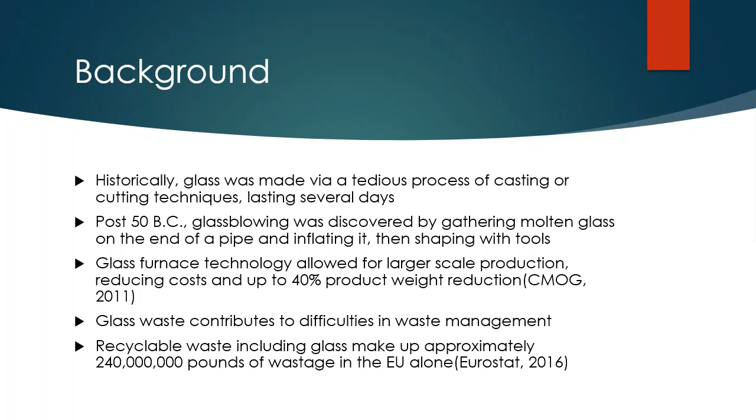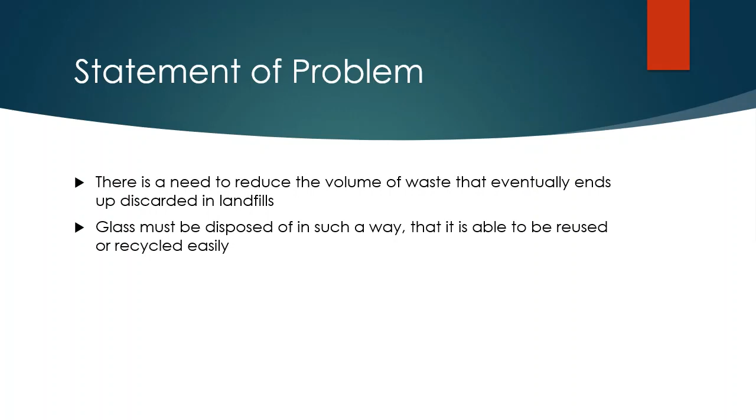Our problem statement states that there is a need to reduce the volume of waste that eventually ends up discarded in landfills. Glass must be disposed of in such a way that it is able to be reused or recycled easily. Our aim for this project is to design a machine that pulverizes glass bottles into glass cullets.

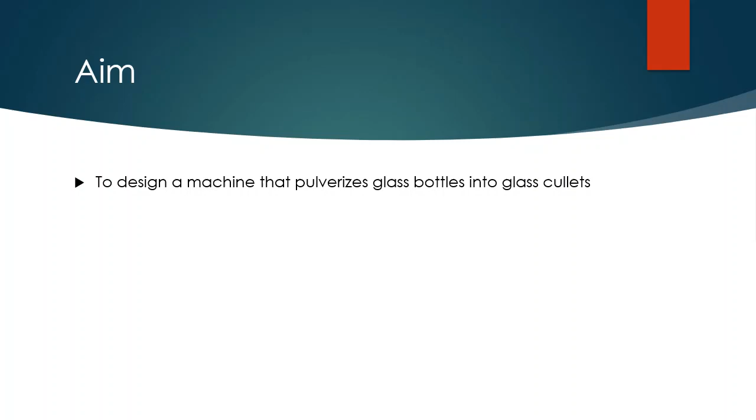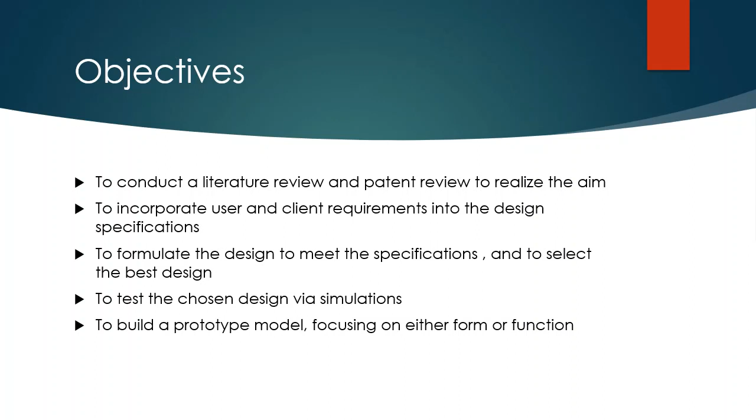The project objectives are to conduct a literature review and patent review to realize the aim, to incorporate user and client requirements into the design specifications, to formulate the design to meet the specifications and to select the best design, to test the chosen design via simulations, and finally to build a prototype model focusing on either form or function.

Before beginning the process of designing the device, relevant literature was studied. It was found that the landfills in Trinidad and Tobago are approaching capacity and waste volume must be reduced. Glass can be recycled in many ways since it does not lose its mechanical properties when reused. For instance, glass residue can be used in place of river sand to improve the properties of cement mortar.

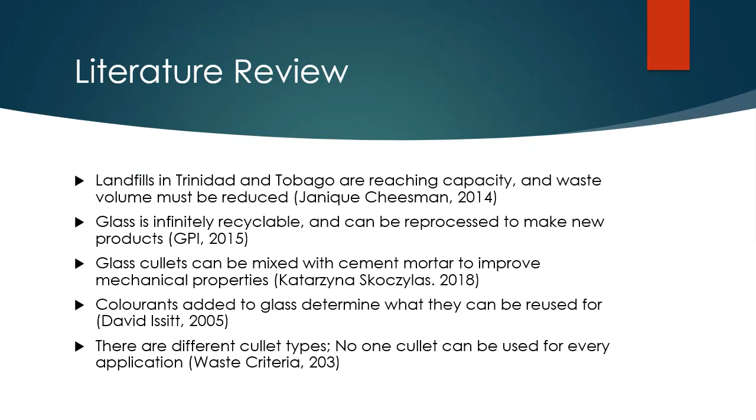However, all glasses cannot be used for all purposes. Colorants added during the manufacturing process cannot be removed, and also, glass types determine the cullets they produce.

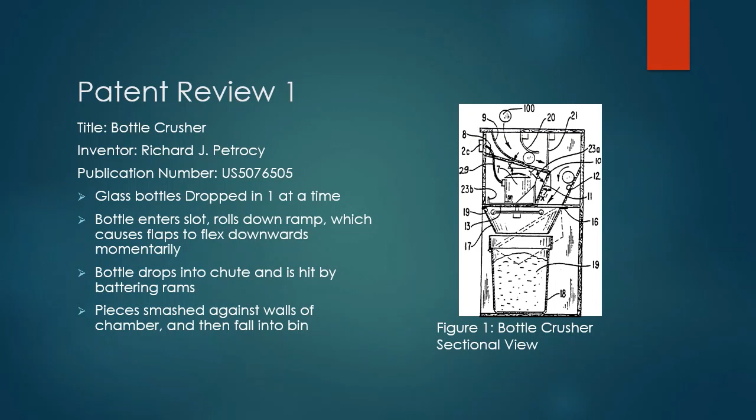Now, 4 patents were reviewed in order to familiarize ourselves with related devices that are already in use. In the first patent, titled Bottle Crusher, glass bottles are fed in the intake slot one at a time. The bottle rolls down the incline and through rubber flaps. It then falls under the influence of gravity onto rotating hammers, which break the bottles into large fragments. These hit the insides of the chamber to break down further, eventually falling into the collection bin.

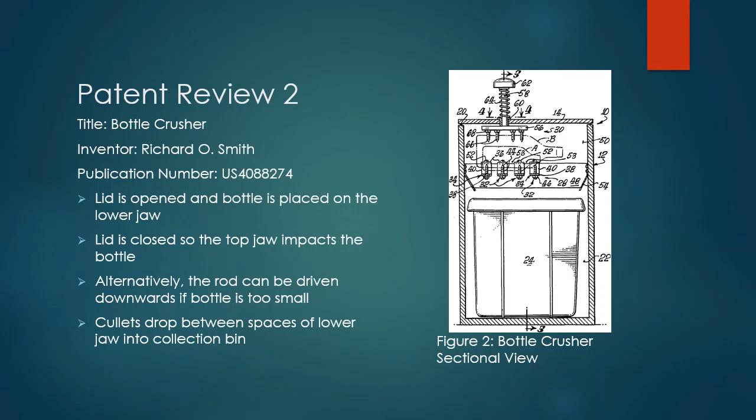The second patent, titled Bottle Crusher, is a manual device. The lid can be opened via a hinge and a bottle can be placed on the lower jaw cradle. The upper jaw is attached to the lid, and so closing this lid will cause that jaw to impact the bottle. The many tooth members allow for a reduction of force needed to break the bottle. If the bottle is too small, the rod connected to the upper jaw can be driven downwards. In either case, cullets fall through the spacings in the lower jaw into the bin.

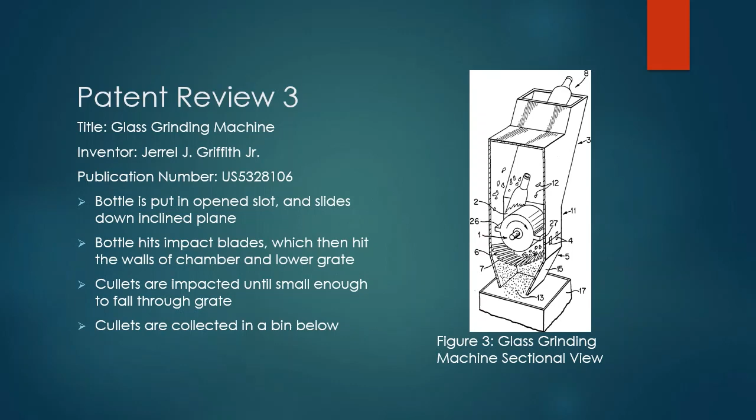Patent 3, titled the Glass Grinding Machine: bottles are fed in and allowed to slide down a ramp. They then hit vertically rotating impact blades, and the ensuing glass shards impact the chamber and lower grate at high velocity. When the grains are small enough, they slip through the grate into the lower bin.

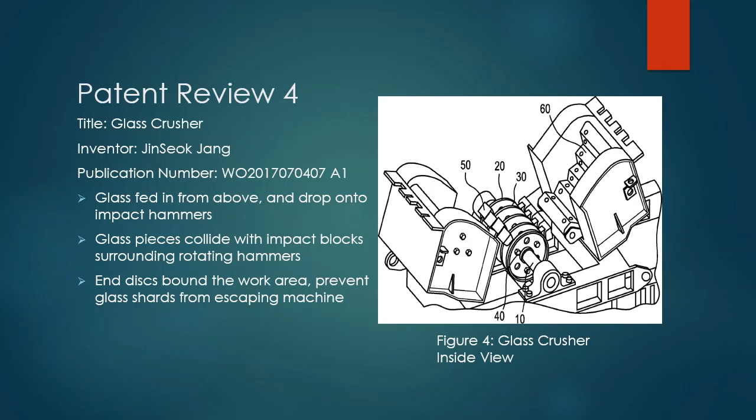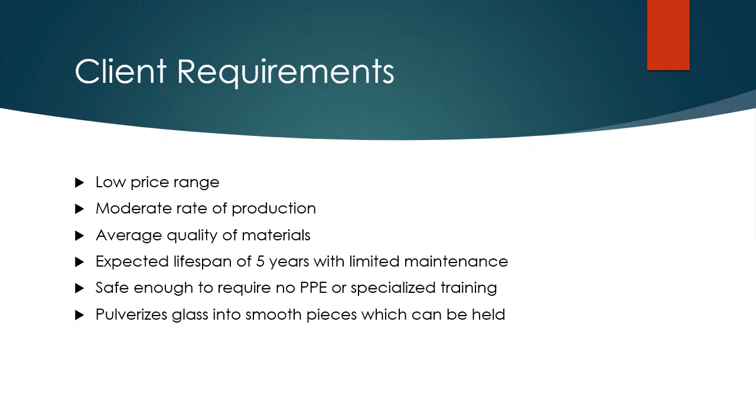Client and user requirements. After enough research, a list of the client's requirements were generated. If able to meet the client requirement, the design should have a low price range, a moderate rate of production, an average quality of material, a lifespan of 5 years with little or no maintenance. It should be safe such that no PPE or specialized training is required, and it should be able to pulverize the glass into smooth pieces that can be held.

User requirements. The machine should be able to be used with a low level of skills. It should be able to be placed on the counters or in corners. It should be able to process one bottle at a time as fast as it can be fed into the machine. And it should be robust enough to require limited downtime.

Design specification. The machine can process glass bottles. It must fit under counters of restaurants and bars. It must use the standard 110-volt power supply. Must have the proper shielding or guards. Cullets must be easily collected. Vibrations from the machine must be minimized. Standard components must be used. It must have a built-in fail-safe, and it must be simple to use.

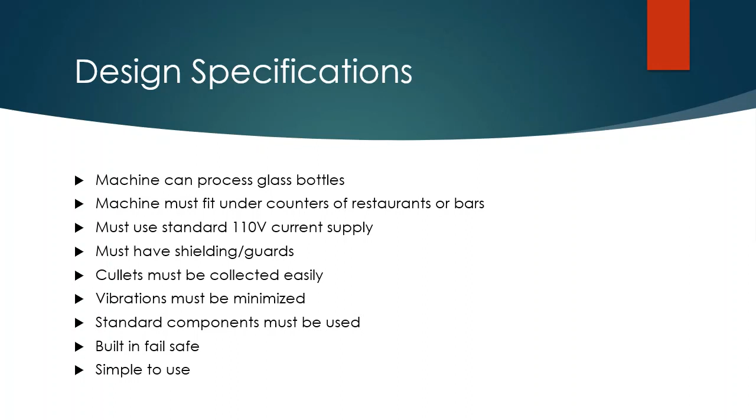Key attributes. Based on the design, the key attributes were developed, and these are user-friendliness, cost, stability, safety, and noise.

The metrics. The metrics use a scale of 1 to 3 in this project, with 1 being the worst case scenario and 3 being the best case scenario.

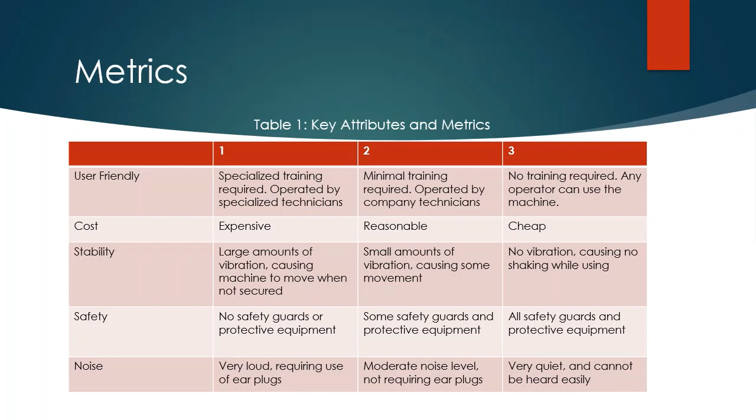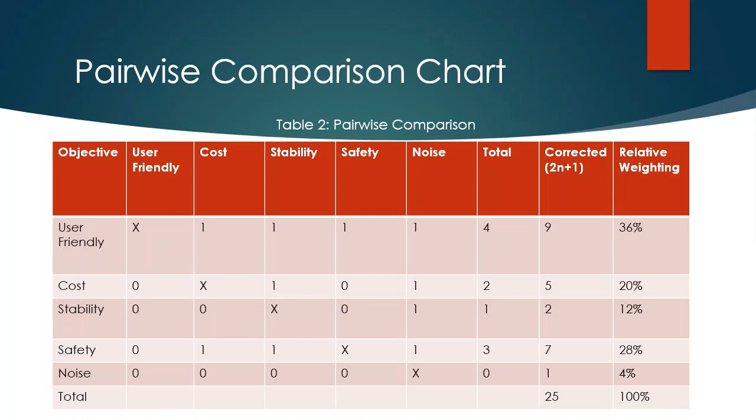We now move on to pairwise comparison, where the relative weighting of each design indicates the importance of each key attribute. In order of most important to least important, user-friendliness is the most important, followed by safety, then cost, then stability, and lastly noise.

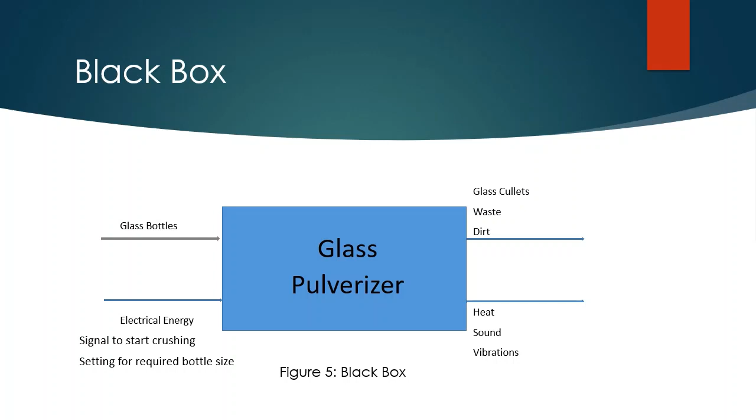Here we have the functional analysis. The first step is the black box. It consists of an input, a process, and an output. The inputs on the left are glass bottles, electrical energy, a signal to start the crushing process, and sometimes setting the bottle size. In the middle we have the process, which is pulverizing glass, and on the right we have the outputs, which are glass cullets, waste, dirt, and energy lost as heat, sound, and vibrations.

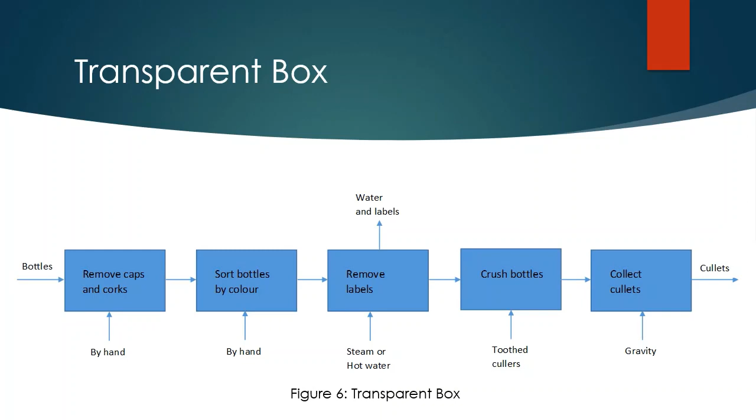Moving along, we have the transparent box, which is similar to the black box, however it shows all the sub-functions involved in pulverizing the glass, as well as the inputs for each sub-function. Then we have the means tree, which shows the main function as well as the sub-functions and the means by which they may be achieved.

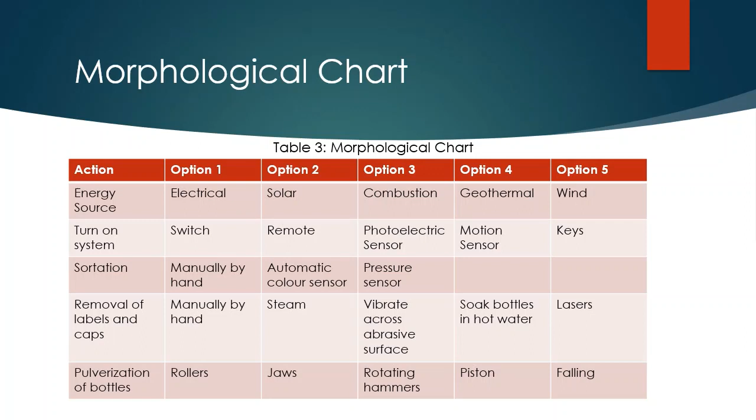The morphological chart is how we explore possible ways of implementing the different sub-functions. It also aids in developing a conceptual design. Moving on to conceptual designs. Using the morphological chart as mentioned previously, 3 conceptual designs were developed.

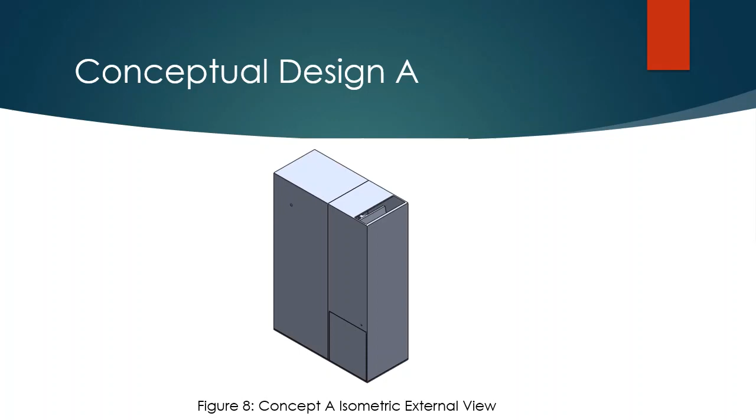Conceptual Design A. The figure to the right shows a partially transparent isometric view of Design A without its body casing. The design is 24 by 10.5 by 34 inches, which makes it compact and easy to store. Glass bottles must be manually loaded into the machine's crushing chamber via its top opening. The rotating arm and drive lever force the mobile toothed plate against the stationary toothed plate, which pulverizes the glass bottles.

This is the device's pulverizing mechanism, which is powered by a motor and belt drive system. After pulverization, the cullets fall through the exit space at the base of the chamber into the collection bin. A door at the base of the device allows for easy placement and removal of the cullet bin. The body casing is easily removable for maintenance purposes.

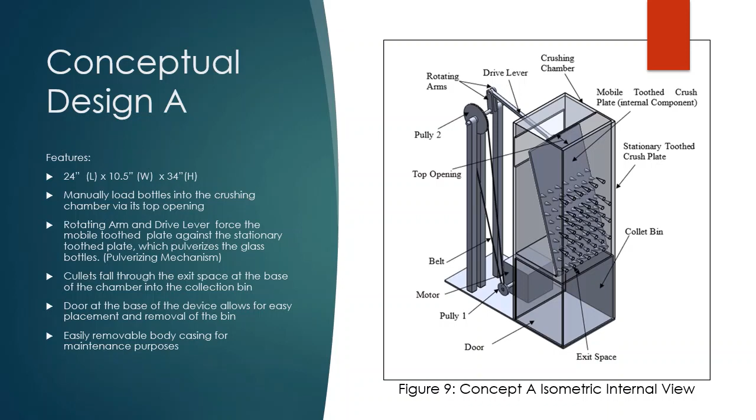Conceptual Design B. The figure to the right shows an isometric assembly of the design's internal components. Also being a compact design, this concept measures 24 inches in both length and width and 44.5 inches in height. Glass bottles must be manually loaded into the machine's chimney, which leads to the crushing chamber.

Driven by a motor and belt drive system, a rotating disc drives the hammer up and down, which impacts and compresses the glass bottles within the crushing chamber. This is the device's pulverizing mechanism.

Sharp teeth at the base of the crushing chamber, as well as at the base of the hammer, aid in the pulverizing process. Under the vibration of the crushing chamber, the cullets fall through the mesh holes at the base of the chamber into the collection or cullet bin.

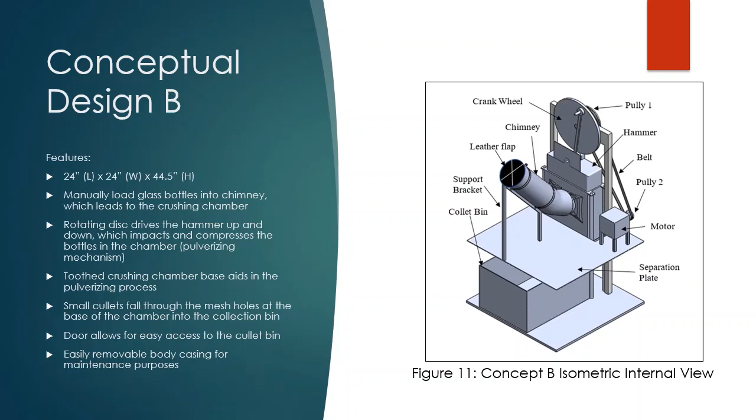Similar to concept A, a door at the base of the device allows for easy placement and removal of the collection bin. The easily removable body case allows for easy access to the device's internal mechanical and electrical components for maintenance purposes.

Conceptual Design C. The figure to the right shows a partially transparent isometric view of the design's internal components. This is the largest design compared to the two previously mentioned, measuring 24 by 28 by 54 inches in length, width, and height, respectively. Bottles must be manually loaded into the chimney, which leads to the pulverizing chamber.

A rack and partial pinion retracts the pulverizing plate upwards while simultaneously compressing 4 springs. When the pinion loses contact, the rack slips and the pulverizing plate is forced downwards by the springs into the glass bottles, pulverizing them in the process.

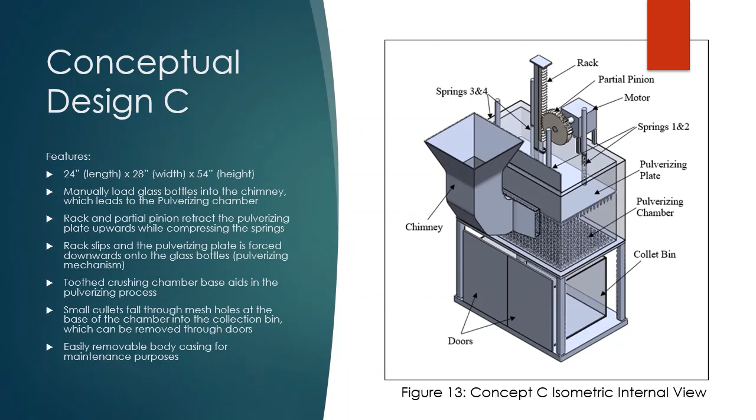The toothed crushing chamber base aids in the pulverizing process. The cullets fall through the small mesh holes at the base of the chamber into the collection bin, which may be easily removed through the doors. Similar to the other two conceptual designs, the body is removable for maintenance purposes.

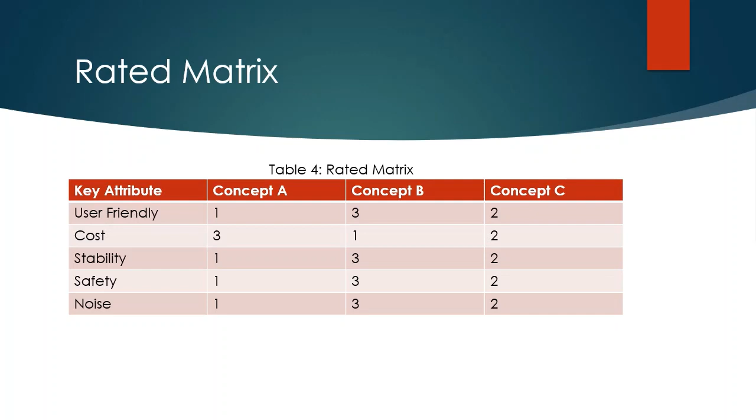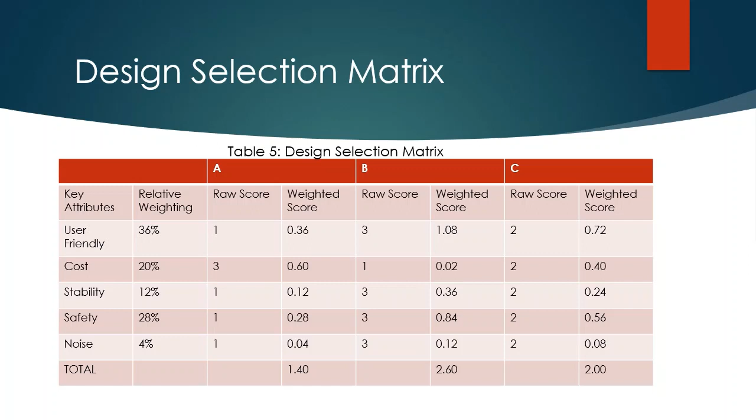Rated matrix. Each design concept was evaluated using the metrics shown in the previous slides to obtain the raw score for each key attribute. Using this design selection matrix and the rated matrix, the weighted scores were then calculated. It was found that design B had the highest total weighted score, and hence it was the selected design for this project.

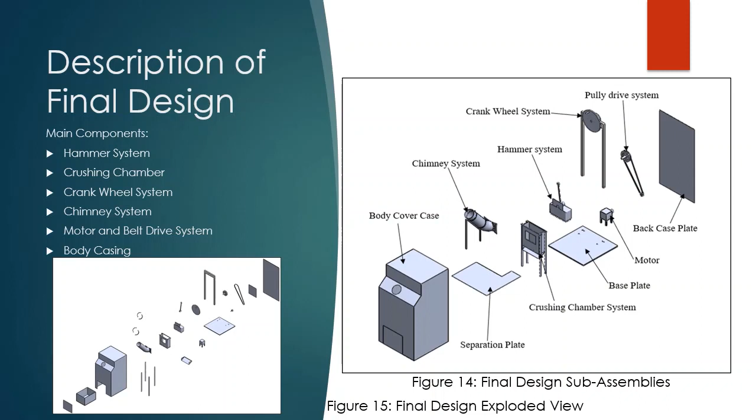Description of final design. The main components of the final design include a hammer system, a crushing chamber, a crank wheel system, a chimney system, a motor and belt drive system, and a body casing.

The hammer system. This system consists of a rigid connecting rod and a hammer. The connecting rod links the hammer to the crank wheel, which transfers motion. The hammer spans the internal cross-section of the crushing chamber and has a series of teeth at its base, which increases the pulverizing effect upon impacting the glass bottles.

The chamber entry cover plate blocks the bottles from entering the chamber when the hammer is at its lowest point of its stroke.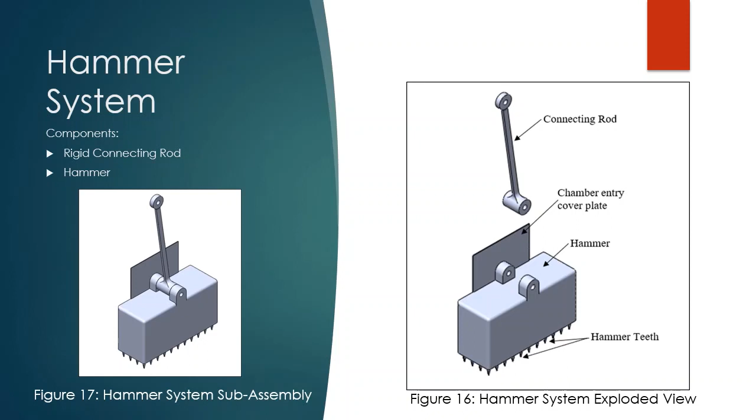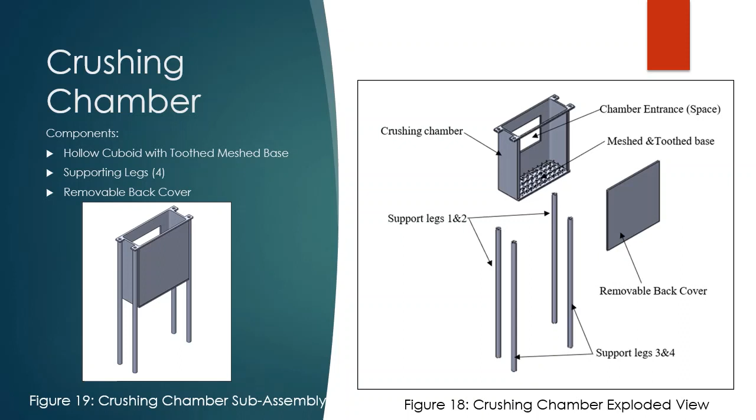Crushing chamber. This consists of a hollow cuboid known as the crushing chamber, which has a toothed and meshed base to aid in the pulverizing and removal of the cullets from the device. The supporting legs act as both a shock absorber and a support. The removable backplate allows easy access to the chamber for cleaning and maintenance.

Crank wheel system. This system consists of a solid disc with a cantilever extended face, a ball bearing, a shaft, support stand, and pulley 1. The bearing allows for rotation of the shaft, which is connected to the disc and pulley 1. The support stand holds this assembly together. The cantilever on the face of the crank wheel serves as a point of connection for the hammer system.

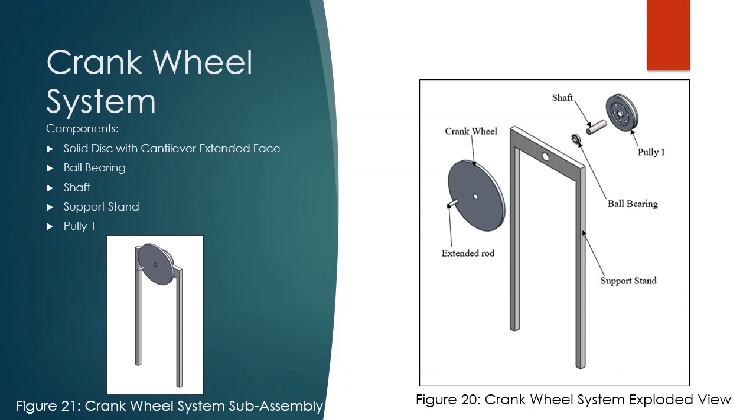Chimney system. This system consists of a cylindrical tube, a support stand, clamps, and a separation plate. The cylindrical tube provides a smooth path for the bottle to reach the crushing chamber. The clamp and supporting stand provide rigidity to the chimney.

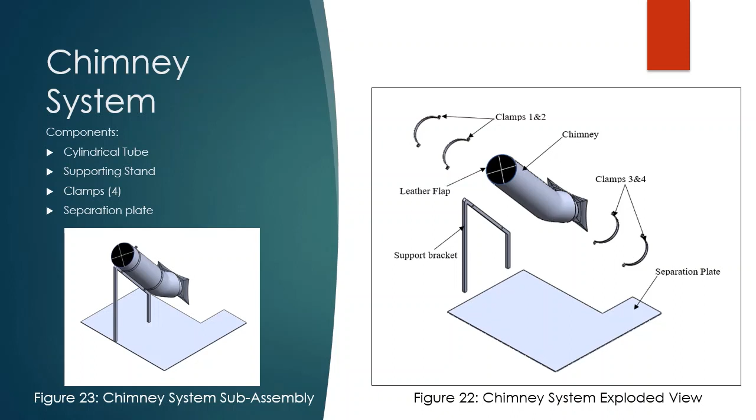The separation plate serves to both provide a base for the supporting stand and to partition the mechanical and electrical components from the user. For user safety, a leather flap was placed over the chimney opening to protect the operator from glass cullets that may travel back up the chimney.

Body casing. This consists of a front case, a back cover plate, a door, and a base plate. The removable front case and back cover plate surround the internal components, providing a protective barrier between the operator and the machine. The door allows for easy access to the cullet bin.

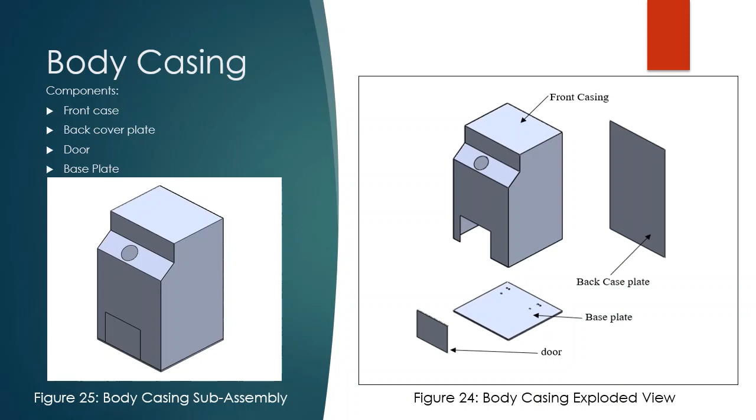The base plate is the foundation of the device upon which all other components are built, and it is hence very important to overall device stability.